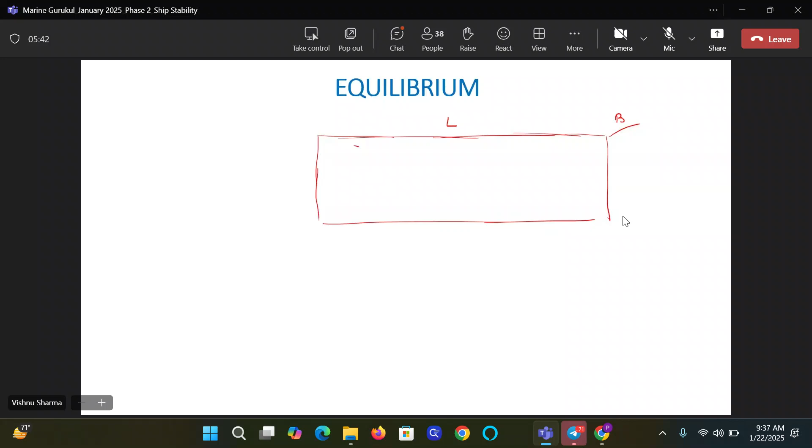Now, when the vessel is intact, what do you have? You have the weight of the ship. So let's say, just for the sake of easy explanation, let's have a box-shaped vessel. It can be any shaped vessel, doesn't matter. Let's say we have a box-shaped vessel of length capital L, breadth capital B, floating in intact condition at waterline WL at a draft D.

Okay, now let us say, guys, there is a compartment midships. It can be anywhere, of length small l, breadth small b, and the compartment is empty. Now the vessel is floating in the intact condition. We all know why the vessel is floating, why it is not sinking more, or why there is no further immersion.

It's not happening because in this condition, the displacement of the ship is totally balanced by the buoyant force of buoyancy, which is acting upwards. What is buoyancy? Buoyancy is the weight of water displaced. In this condition, what is the weight of the water displaced? So what is buoyancy, guys? Buoyancy, you all know, is the weight of water displaced.

And what is this weight of water displaced equal to? It's equal to the volume of water displaced into the density of the water. Now, if this buoyancy is equal to the displacement of the ship, there is an equilibrium between the two opposing forces, one acting downwards, the other acting upwards. And the vessel strikes an equilibrium and is now floating at draft D.

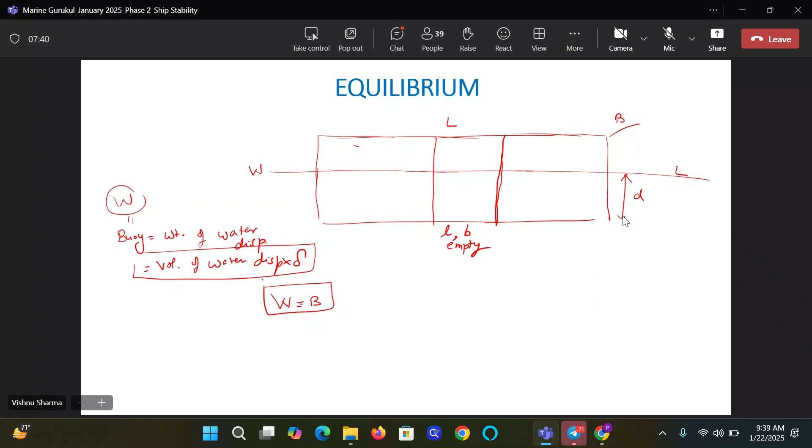Which volume in the intact condition is contributing or providing the buoyancy? Obviously, the underwater volume of the vessel is displacing water equal to the underwater volume in this case. So let me divide this underwater volume into three parts. Let's say part 1, part 2, part 3, or V1, V2, and V3.

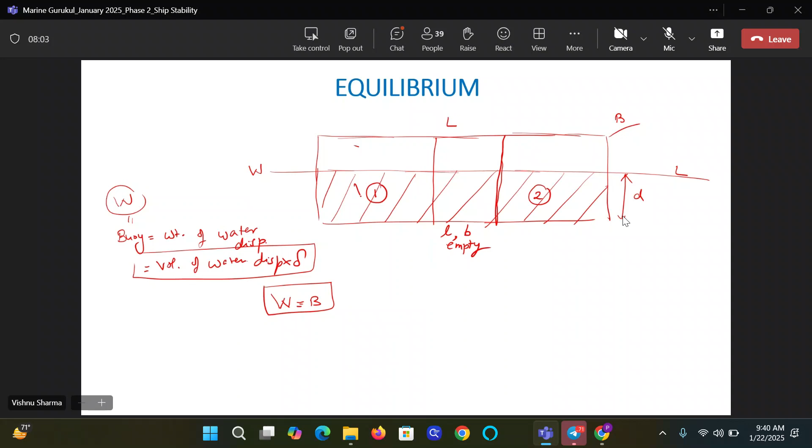In the intact condition, the buoyancy will be equal to total underwater volume V1 plus V2 plus V3 into the density of the water, whether it is seawater or dock water. And this buoyancy, as long as it's equal to displacement, the vessel will be in equilibrium, there will be no immersion. Neither will the draft decrease, nor will the draft increase. Right? Do you all appreciate this equilibrium in the intact condition, or does anybody have any questions or doubts in your mind about this condition, guys?

Don't think we are not touching bilging. Everything that I start from gets connected eventually to what you're doing. So if anybody has any doubts about buoyancy or anything, please let me know.

Through which point is the buoyancy assumed to be acting, guys? It's assumed to be acting through the point called the center of buoyancy, which we represent by capital B. Through which point is the weight of the ship assumed to be acting? It's assumed to be acting through the center of gravity, which in diagrams we'll represent by capital G. All this you're familiar with. Am I right, guys? Yes or no? Yes sir.

Now, what will happen if this compartment, which was earlier empty, of length small l and breadth small b, gets bilged? That means it gets damaged, its structure gets damaged below the waterline, not necessarily the keel. It can get damaged on the sides also, as long as the damage is below the waterline.

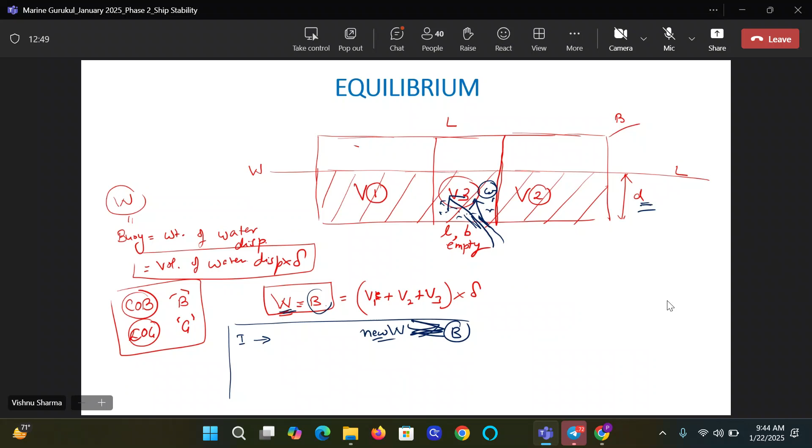Now, as this vessel sinks more and more, additional volume will go under the water, and what will happen? That buoyancy will start increasing. This sinkage will happen until the time the new buoyancy becomes equal to the new displacement. Am I right, Peter? Does it make sense? Yes, sir. Correct.

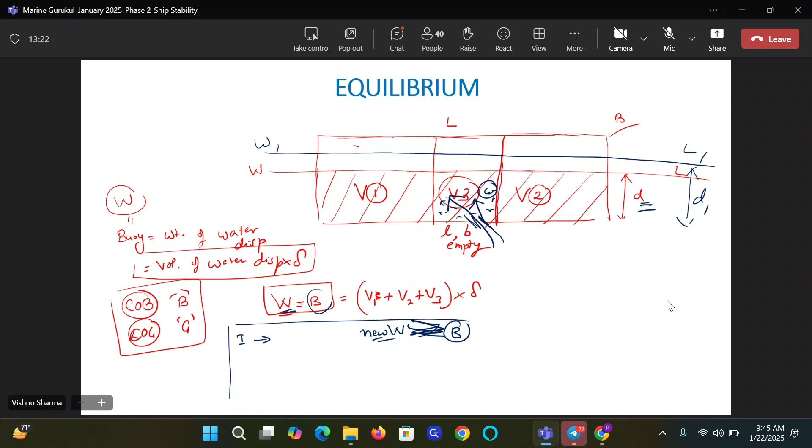When the new buoyancy, which is new underwater volume multiplied by density of the water, when the new buoyancy becomes equal to the new displacement, the vessel will reach another equilibrium at a new draft, D1. So water will rise in this compartment up to this level. This is the water which is assumed to have been added to the vessel. So the new displacement will be the old displacement plus the weight of the water in this blue box that I have made. And at W1L1, the buoyancy will also be equal to it, and a new equilibrium has been reached.

Very logical, guys, yes or no? Correct? Now, if you follow this process, what I have just described, the naval architects who follow this process of dealing with the water that has come in, this method is called the added weight method.

Sometimes these questions can also be theory questions. So this method will be called the added weight method. Why? Because you are assuming that the water which got into the ship because of bilging is the weight added on board or loaded on board, whatever you want to say.

And guys, you have done so many questions of MV Hindship, non-MV Hindship, in which whenever the weight is loaded or discharged on the ship, it does change the stability of the vessel. Am I right, beta? I'm not saying whether it increases the stability or decreases the stability. When you load a weight, what can it change? It can change the KG of the ship, it can change the GM of the ship.

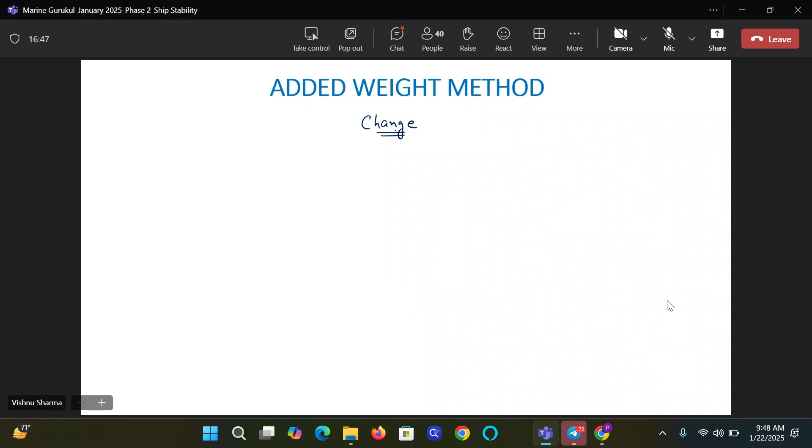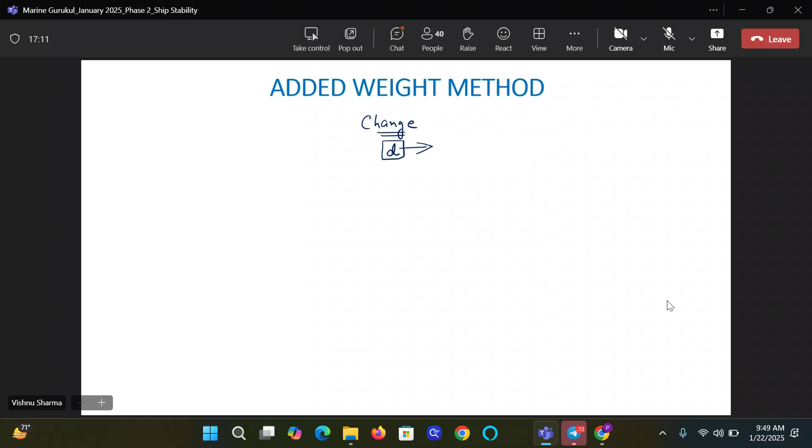So there will be a change in draft. Can you tell me what was the reason for change in draft? Was it reduction in buoyancy or was it an increase in displacement? What was the trigger? The trigger was increased displacement. Correct? This is the trigger for change in draft. Will the displacement increase? Yes, displacement is also increasing because the weight is added.

Now you all know what happens to the hydrostatic particulars. Eight of them are listed against draft, or if you enter against displacement, again draft becomes the eighth one. So what happens when the draft or the displacement change, do the hydrostatic particulars of the ship change? Yes or no? Yes, sir. All hydrostatic particulars will change. A change I have already written on top, so what all will change is what I'm writing here.

Guys, when you add a weight, does it potentially shift or does it have the capability of shifting the center of gravity of the ship? Yes or no? When you add a weight on a ship, does it have the potential of changing the center of gravity location? Yes, sir. So your center of gravity, in all likelihood, unless you add right at the old center of gravity, then of course there'll be no change.

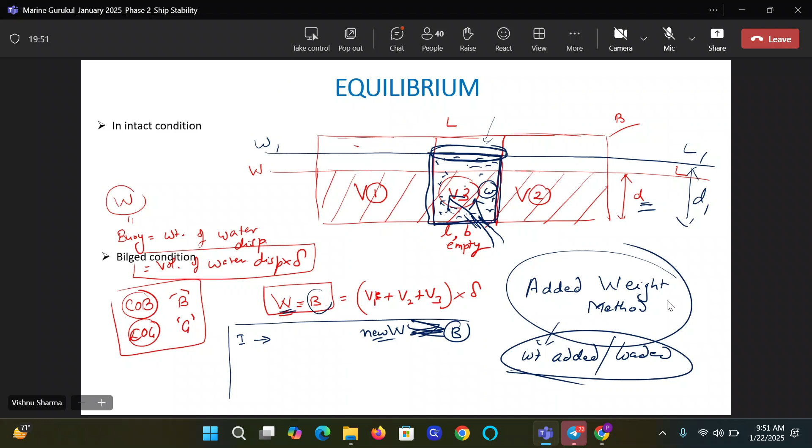So guys, if free surface is created in the bilged compartment, the FSM of the free surface will add to the FSM of the ship. Very logical, guys. Yes or no? Am I right?

Correct. Now, whether the FSM changes or does not change, tomorrow there may not be a free surface created. The compartment may be completely filled up with water, like a double bottom tank if it gets bilged. So the FSM may not be created, the FSM may remain unchanged. But in that case also, FSC will always change. Why? Because the displacement has changed.

Even if FSM remains the same, change of displacement will cause a change in FSC. Am I right, class? Yes or no? Yes, sir. Okay, so now you know what all changes have taken place. You can find the new parameter, whatever is required, whether draft, whether GM, whether list, whatever, the way you have been dealing with the loading of weights, which you are very conversant with.

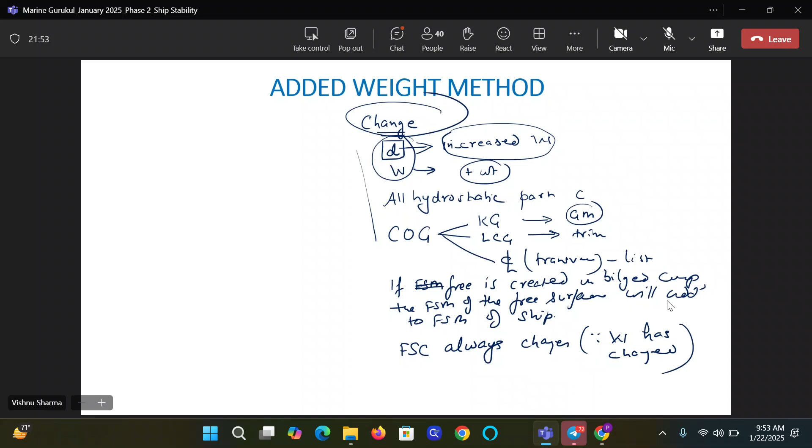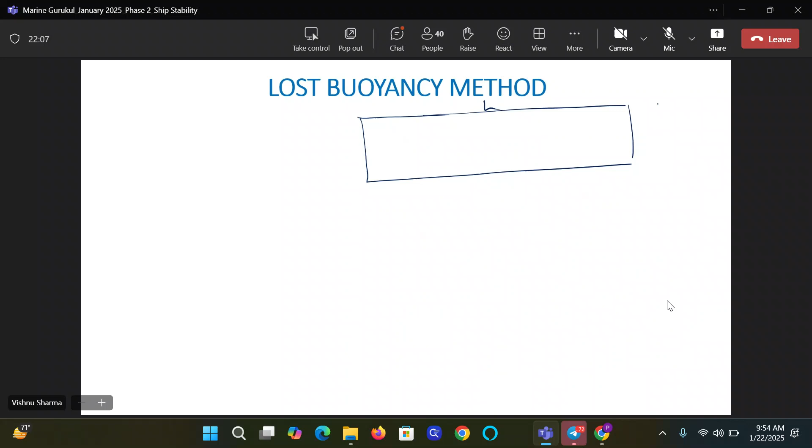Now there is another school of naval architects which say, no, we don't want to treat it as the weight added on the ship. What is their logic? Their logic is this: this was the vessel in the intact condition, floating at this waterline WL at a draft of D, had this empty compartment of length small l, small b, and the compartment is empty.

Now, this compartment suffers bilging. We had called these volumes V1, V2, and V3. Which all volumes were responsible for providing buoyancy, which we call volume of buoyancy? Was it V1 plus V2 plus V3? Yes, all three of them. Good. And this volume of buoyancy was equal to volume of displacement.

What is volume of displacement? The displacement of the ship divided by the density of the water. So this volume of buoyancy and volume of displacement were same, they were in equilibrium. If you multiply volume of buoyancy by density and volume of displacement by density, one becomes displacement, other becomes buoyancy. Both are equal. The vessel is in equilibrium.

Now, like the earlier case, let this empty compartment get bilged or suffer bilging. The water enters into this compartment. Now, when you ballast a tank, what do you do?

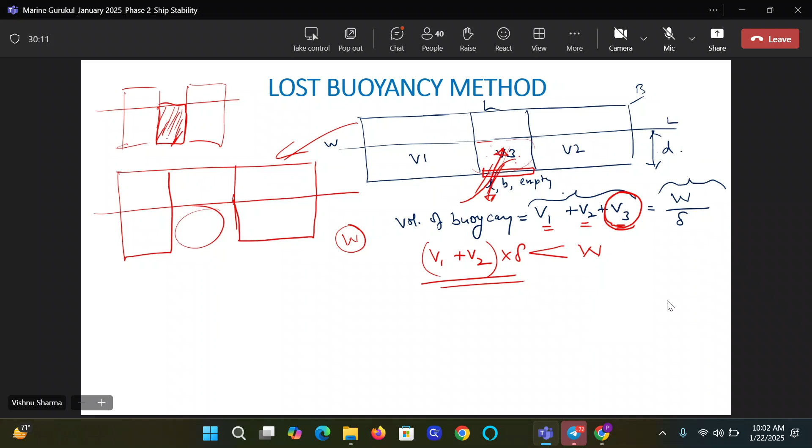Displacement has not changed, but buoyancy has fallen short because some buoyancy was lost due to bilging. So buoyancy is less and displacement is more. There is a resultant downward force which will cause the vessel to sink. As she sinks more, the buoyancy will increase, and at some new draft, when new buoyancy becomes equal to new displacement, the vessel will reach a new equilibrium.

Now in this case, has the draft increased? Yes. So what has increased here - the draft has increased. But what is the trigger for the change of draft? Buoyancy becoming less than displacement - that was the trigger for draft to increase. So the outcome is the same as the previous case, same as under the added weight method. The vessel goes to a new draft in both cases.

In the added weight method, the trigger was an assumed increase in displacement. Here the trigger is an assumed reduction of buoyancy. Since this method is based on the concept of buoyancy having been lost, this method is called the lost buoyancy method. So is it clear why it is called the lost buoyancy method?

So now let me make a list of things which will change and not change in this method. What will change? You just told me draft would change - very good, it's going to change. What will happen to displacement? Is the displacement changing in this method, guys? No sir. Why not? Have you added any weight on the ship? No sir.

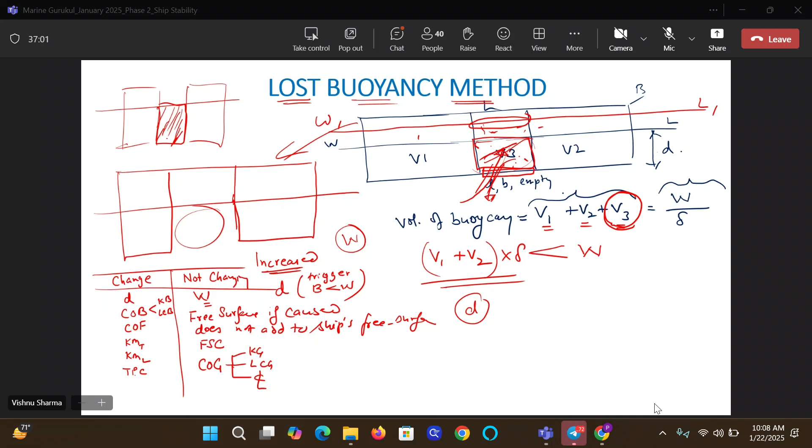Then if there is no technical superiority, the preference of a method boils down to the convenience of the user. Am I right, guys? If there is no technical superiority, then which method you would prefer depends, in a given scenario, on what helps, what you find convenient. Am I right, guys? Yes, sir.

Yes, sir. Now, in most cases, because the displacement does not change, the center of gravity does not change, and the free surface inside the bilged compartment does not bother you, therefore lost buoyancy method becomes more convenient in most of the cases. Therefore, in most cases we use lost buoyancy method.

Only in stray cases where you can clearly see that added weight method is making my life easier, I may switch over, but I will not switch over on day one. We'll talk about it on the last day when we do bilging.

So what is the preferred method? Preferred method is lost buoyancy method. Reason for preference is not technical superiority, it's the convenience, because many important parameters do not undergo a change under lost buoyancy method. Am I clear to everybody?

Yes, Captain. Okay, so please don't tell me tomorrow that I told you lost buoyancy method is better. No. Lost buoyancy method is more convenient, and that's why most of the time we'll be using this.

So if you want to note down anything, note it down. This can also come as 'compare lost buoyancy method with added weight method' or 'describe any one of them' — whatever it is, that can be part of your theory question also. So please don't mess it up if it comes in theory.

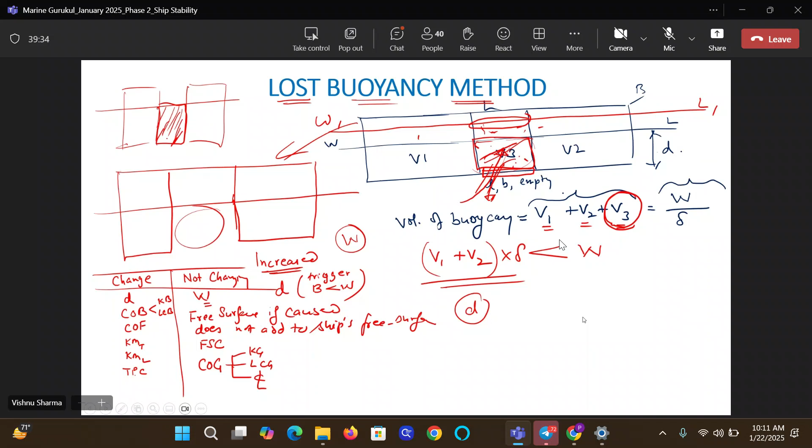Now, guys, what did we see — that the draft has increased? So in every case, the first requirement will be to get the new draft at which the vessel will float post bilging. What will be the new draft after bilging? So that will be the first requirement that comes. And that is called sinkage.

Now, I don't have everything prepared in hand because requirements change from batch to batch. People come with different types of doubts, and therefore it is always explained live in the class, guys. So please feel free to let me know if you have any questions.

Guys, now we'll find sinkage in the lost buoyancy method. I'm keeping the compartment midships. We'll keep moving things later on. Let's first learn things in steps.

Guys, when we do the questions, you will have to use notations, because otherwise, if you start using values from the word go, your life will become miserable. Whenever we do the questions, the length of the ship will always be represented by capital L. The breadth of the ship will always be represented by capital B. The water line in the intact condition will always be represented by WL, and the draft in the intact condition will always be represented by small d.

And let us say this ship has a midship compartment extending from side to side or not, it doesn't matter, having length small l. So compartment length will always be represented by small l. Breadth of the compartment will always be represented by small b. Now, this compartment is empty.

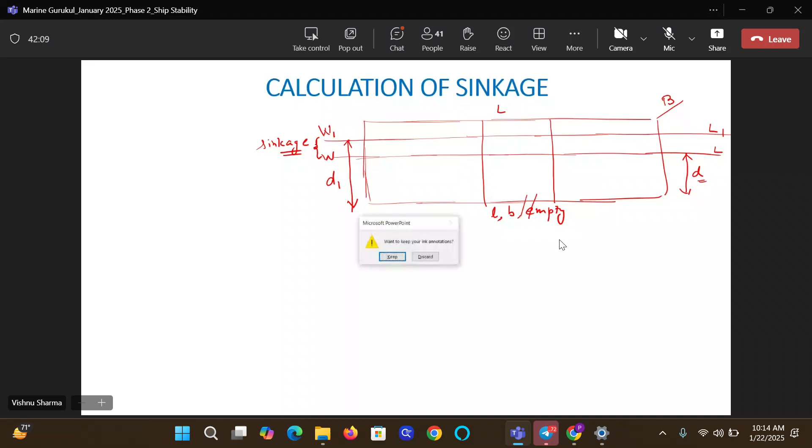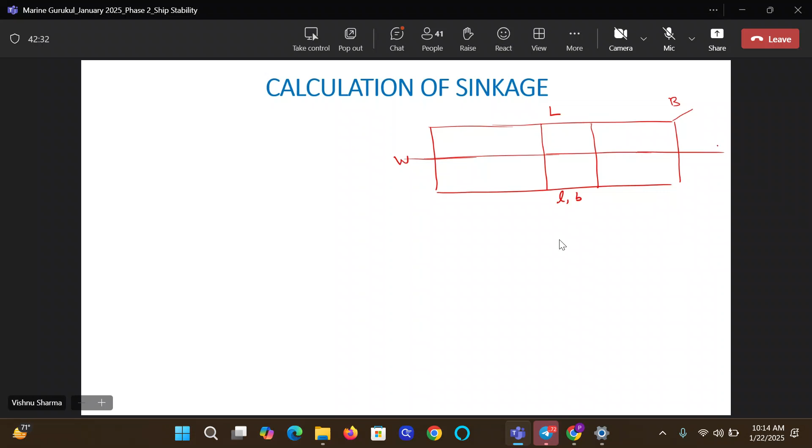Now, in the intact condition, I'll clear this diagram. I've explained this, I'll mark them now in steps. Otherwise, in this diagram, some of you will again start going left, right, because I'll add W1, L1 in steps. We have length, breadth, and the vessel is floating here with draft D. We have volume 1, volume 2, and volume 3.

Now, guys, in the intact condition, volume of buoyancy is equal to V1 plus V2 plus V3. I'm sure everybody agrees with it, right? Yes, sir. Correct? Now, if this compartment gets bilged, which buoyancy is lost?

Which buoyancy is lost if this empty compartment is bilged? V3. So that means now I'm shading the lost buoyancy. Now somebody may say, sir, water will rise further up, that will be lost buoyancy. Guys, in the intact condition, the volume above the water line is your reserve buoyancy, which will help you in surviving if there is bilging.

So buoyancy lost is not up to the new draft, it is only up to the intact water line, correct? So do you all agree with me that buoyancy lost in this case will be V3? But if I write it in notational form, since every time we won't call it V1, V2, V3, this is equal to small l into small b into d. Does everybody agree?

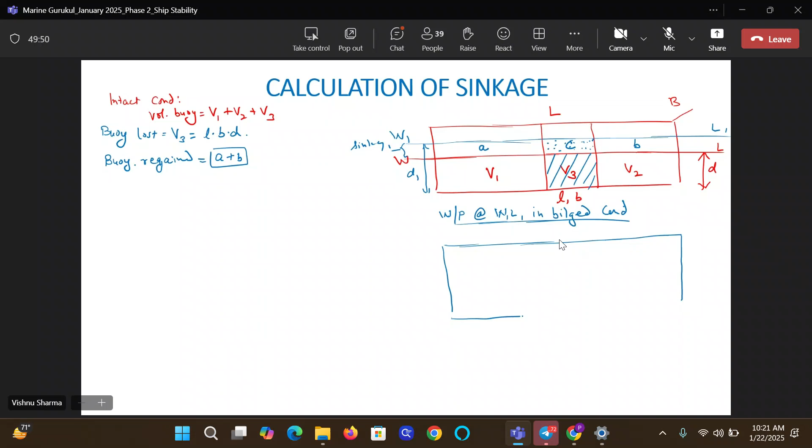Tell me. A rectangle, a big rectangle, of what dimensions? L into B, capital L into capital B. So you will see the ship structure at the water line like this, and then you'll see this bulkhead and this bulkhead being like this here. Am I right, guys?

When you cut the ship, will you see the seawater here? Yes or no? At the water line, when you cut at W1L1, will you see seawater from top in a bird's eye view? Yes, yes, yes, okay.

So this total length of the water plane is L, the total breadth of the water plane is B. But this part of the water plane is not intact, it is lost to sea because this is occupied by seawater. And what is the length of this water plane? Small l. And its breadth? Small b. Small b can be the same as capital B or less than that, doesn't matter. That's why it's written like this.

Does everybody agree that some water plane is lost? Yes or no? Am I right, guys? Yes. Now I'll introduce a few terms which need to be clearly understood because we'll be using them in our discussion.

One is whole water plane. Whole water plane in this diagram is capital L into capital B. Then lost water plane area in this diagram is small l into small b.

The remaining area which is still intact is called the intact water plane area, and which will be here in this case. Somebody can say, sir, I'll add A1 and A2. Yes, you're right, that is the intact area. But normally, just so most of the questions fit in comfortably, you can do A1 plus A2, but I think a convenient way would be if I say whole water plane minus lost water plane. Does anybody have any objection to that instead of saying A1 plus A2?

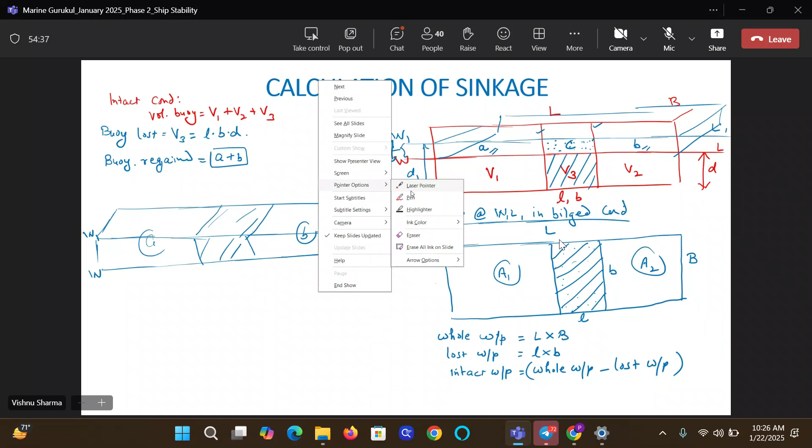Is the water plane at WL like this? With this much lost at WL, is this the water plane? If I cut the ship in the bilged condition here, will the water plane be same? If I cut somewhere between WL and W1L1, will the water plane be same? Some of it will be lost. Yes or no?

Water plane at W1L1, you have already agreed. That means the water plane from WL to W1L1 in the bilged condition is the same. Does everybody accept it, or does anybody have any doubts?

Guys, can you close your register and put it flat, your notebook flat on the table? The notebook will look like this, what I have kept. Yes or no, beta?

Correct? If I ask you to calculate the volume of the notebook, what will you do? You'll measure the length, you'll measure the breadth, and you'll measure the height of the notebook, and you'll multiply to give me the volume.

Now, if in your notebook I cut out some part, it may be from one end to the other, or it may be something here like this. Now, if I cut out from one page to the other, why did you multiply capital L and capital B with the height? Because the area of each page was the same, each page was length into breadth. Therefore, you multiplied with height. Am I right, guys?

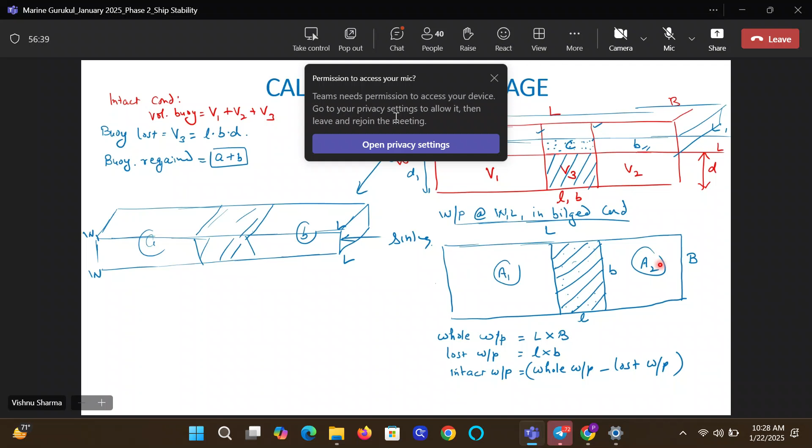Now, if I have to calculate the intact, the whole A plus B here, one way is I can calculate A plus small b. Second, can I take the intact water plane and multiply by the height of the notebook?

If I cut out something from your notebook and each page has the same area cut, the cutting is the same on all pages. So every page has lost the same area, correct? If every page loses the same area, then the left area in each page will be the same. Yes or no?

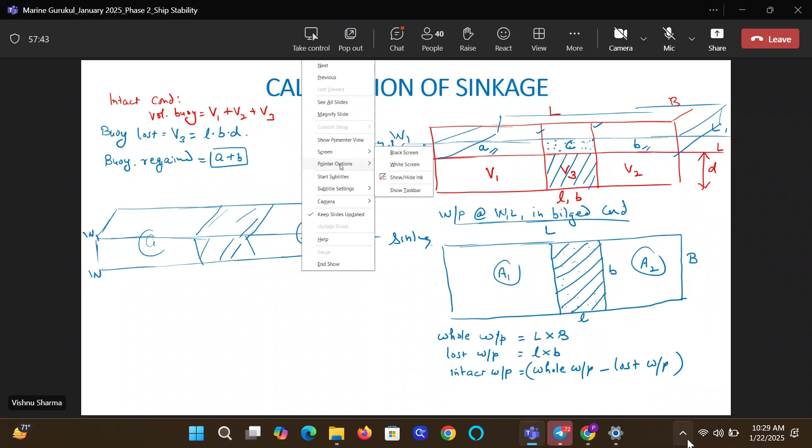And if I calculate whatever is left out in the page and multiply by the height, will I get the left out volume, the remaining volume? Yes or no? Do you agree with me? Tell me, yes or no.

Okay, so instead of calculating A and B separately -- and what is A and B? You have already told me A and B is the buoyancy regained. So if I write like this, am I making any mistake? That buoyancy regained will be equal to intact water plane area, multiplied by sinkage.

Buoyancy regained will be intact water plane area into sinkage. Like I told you with your notebook, if you cut out the same area from your notebook on all the pages, then how can you calculate the remaining volume? Remaining volume will be the remaining area on each page multiplied by the height of the notebook. Yes or no? Am I right, guys?

Anybody in the class who is not on board, please let me know, because once I clear this, coming back will unnecessarily eat more time. If you have any doubts, let's discuss them here.

The vessel floats on law of flotation. So how much buoyancy has the vessel got to regain? She will regain as much as she lost, because buoyancy cannot become more than the displacement of the ship. The vessel will regain buoyancy equal to what it lost. So by law of flotation, buoyancy regained has to be equal to buoyancy lost.

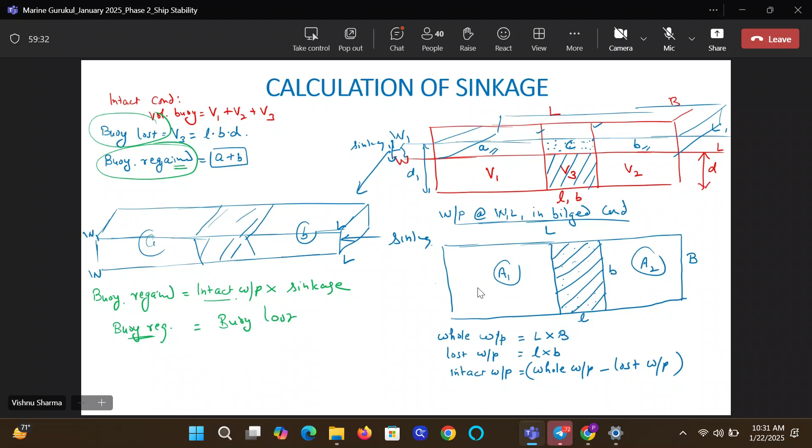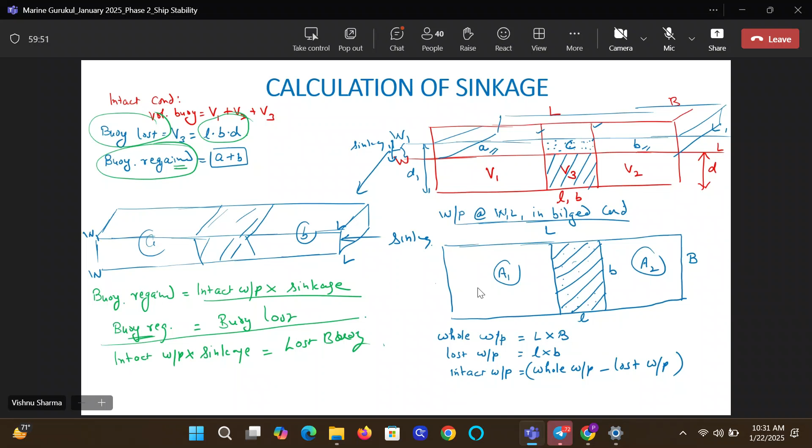What is buoyancy regained? We have got it as intact water plane into sinkage. How much is the buoyancy lost here? You wrote it as small l, small b, small d, but I'll just say lost buoyancy, whatever it is. From this expression, what do you get sinkage equal to? Sinkage is equal to lost buoyancy divided by intact water plane. Do you agree with me? Yes or no?

Please review it. Let me know if there is any concern or doubt. This is the formula which will be used to calculate the sinkage that is caused. Please take your time, 30, 40, 50 seconds, a minute to review it. And if something is not clicking and you want more clarification, I'll try and change examples if I can. Let me know your doubts.

Everybody seems to be aligned, is it? Shall I take it that way, class? Because there are no questions coming. Clear? Because after this we'll go to the questions. Of course questions will start with simple ones, then variations will come. All that will be part of the learning process. So if there are no doubts, can I go to questions then? Please give me a go ahead if everybody is okay with it.

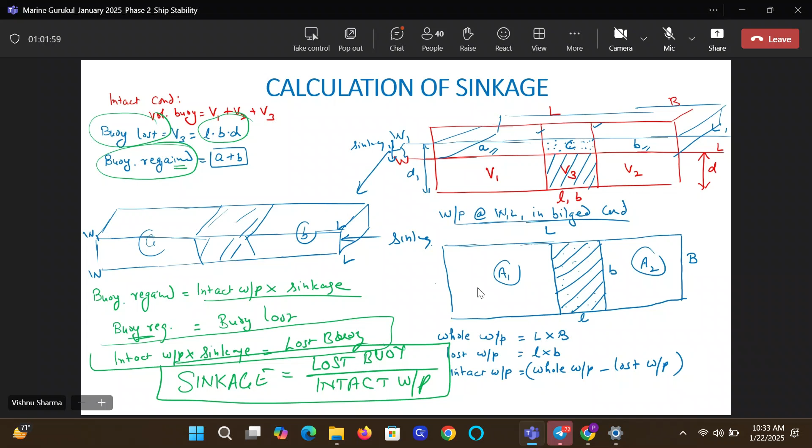Please remember sinkage is equal to lost buoyancy upon intact water plane. And now I'll tell you stepwise the process of doing these questions. As we go through a question, I will tell you. Here is the first question.

Before bilging you already know, I just want to revise again so that people don't miss it. Now, what you'll do, I'm doing part one right now, not the bilging part, I'm doing the intact part right now. How do you get GM based on our discussion on moment of inertia?

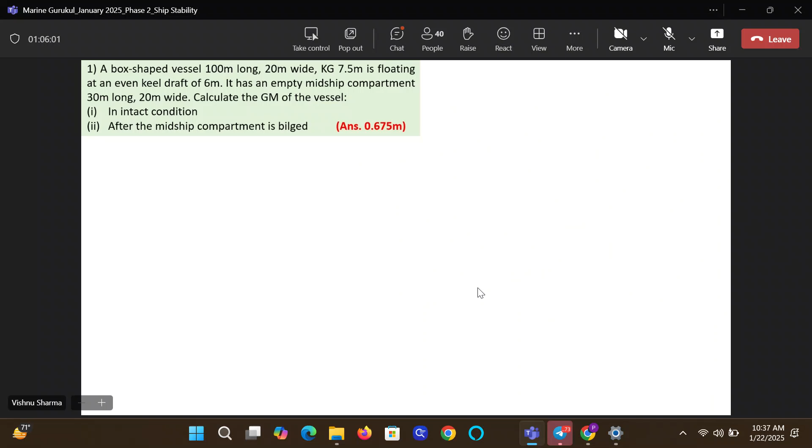Okay, now we go to the bilged part of it. Pay attention, and anytime you have any doubt, just unmute and interject. Guys, when we deal with the bilging thing, diagrams are very important.

First, we'll make the side profile view. What do I mean by profile view? This one. So first make the intact condition.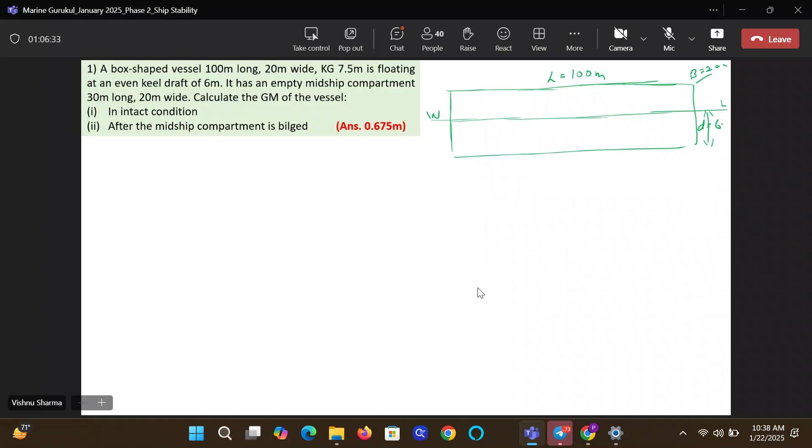Pay attention, this will hold the key to the entire discussion. Capital L, the length, capital B, the breadth, intact water line, WL, draft small d, 6 meters, then the compartment in question, small l, 30 meters, small b, 20 meters is empty.

Is this bilge condition or intact condition, guys? Intact condition. Very good. Now, after this, I'm changing my marker to red. This what I have done is the intact condition.

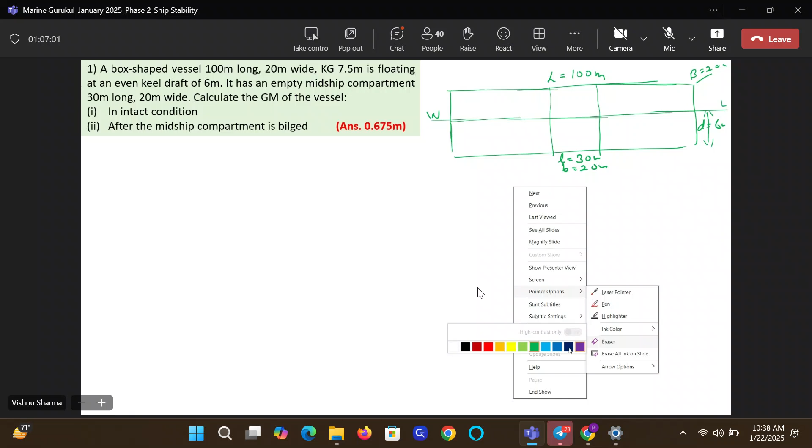Now, based on the question, you will shade the lost buoyancy. I am sure in this case, you will agree that the lost buoyancy is this. So you'll shade it like this. Correct, beta?

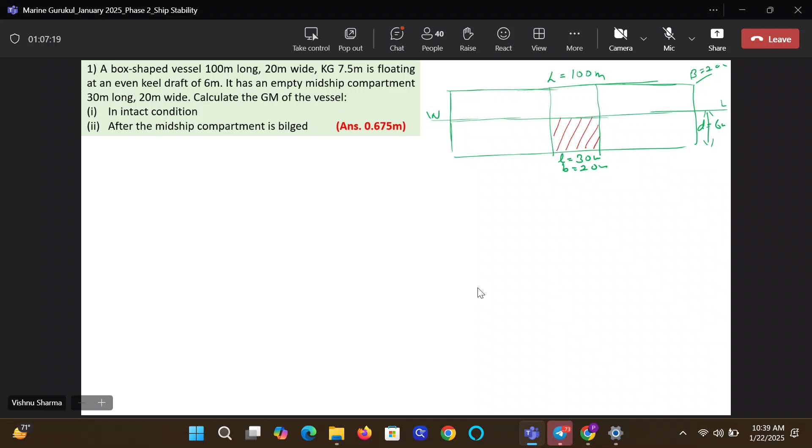Yes sir. Then you know that we are following the lost buoyancy method class. Under lost buoyancy method, if buoyancy is lost, that will cause the vessel to sink and she will come to a new equilibrium. Of course, if she sinks and does not survive, then you're not here to do all this, right? She sinks to a new water line W1 L1.

Correct, beta? Does everybody agree? Yes, sir. Now, you will look at the situation and then ask yourself this question.

Will the water rise in the bilge compartment from WL to W1 L1? What is your answer, yes or no? Yes. Just dot it, don't cross it, because the crossed one is the lost buoyancy. Otherwise, it will mislead you.

We'll have the final draft of D1 here when it comes. Any questions on this side profile diagram, clear guys? Is that clear to everybody what is to be shaded, how it has to be drawn?

Now, next you will draw the water plane area at which level, at what draft? W1, L1. The bilged final draft.

Based on our discussion on the previous slide a while back, I'm sure, and if you don't agree with me please let me know, I'm sure you'll agree that the water plane area will be 100 meters by 20 meters. You will see these bulkheads here, and this will be lost.

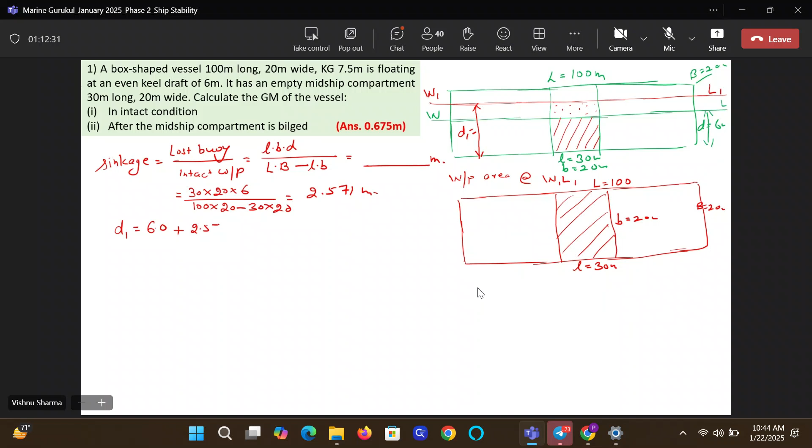How much will be D1 then? 8.571. Very good. Put it on the diagram.

Guys, whatever steps I'm telling you, if you follow them religiously, don't try to cut short, don't try to unnecessarily go left, right. You will have no problems.

Now, guys, we need the GM in the bilged condition. So what do we need to calculate? We need to calculate KM, in bilged condition. What is KM equal to? KM is equal to KB in the bilged condition plus BM in the bilged condition.

Now, guys, in this case, KB will come D1 by 2. But I'll tell you later when it will be D1 by 2, and if you can make out, you can avoid calculations. But every time it is not going to be D1 by 2. Whether it is D1 by 2 or not, whenever you have doubt, you can always resort to calculations.

Now let me tell you how to calculate KB. Though I know it will be D1 by 2, we have to learn the method of calculation.

Guys, KB will be calculated by principle of moments, and moment about which axis? Keel. Now, whatever I'm messing up in the diagram, please don't do that. Don't mess up your diagram.

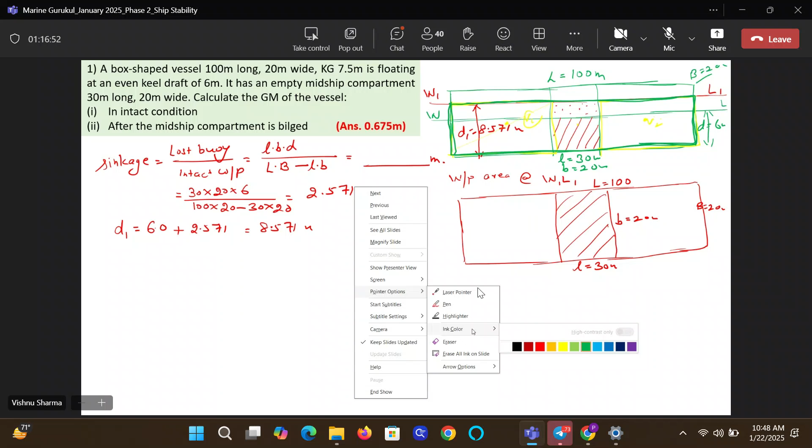Yes, correct. Out of this entire underwater volume, this volume, where I'm making the red box, is not contributing to buoyancy. Correct, beta?

Yes, sir. Out of this underwater volume, can you tell me in notational form which volume is not contributing to buoyancy? Small l into small b into D1. Very good.

If I take the lever of this volume about keel, I'll get the vertical moment of the volume which is under the water but not contributing to buoyancy. Am I right? Can I get the vertical moment of this red volume also? Correct, beta?

So instead of adding the vertical moment of one volume to the other, what I'm doing now is from the whole, I'm subtracting what is not helping my cause. So can I say that if I take the vertical moment of the underwater volume and from there I knock off or subtract the vertical moment of the volume which is under the water but not contributing to buoyancy, what will I be left with? Tell me, what do you think I'll be left with?

Intact buoyancy, we'll be left with vertical moment of volume of buoyancy, right? I'm saying if I take vertical moment of underwater volume up to bilged water line, and from here I subtract vertical moment of underwater volume not contributing to buoyancy, what will I be left with? Will I not be left with vertical moment of volume of buoyancy? Yes or no? Am I right?

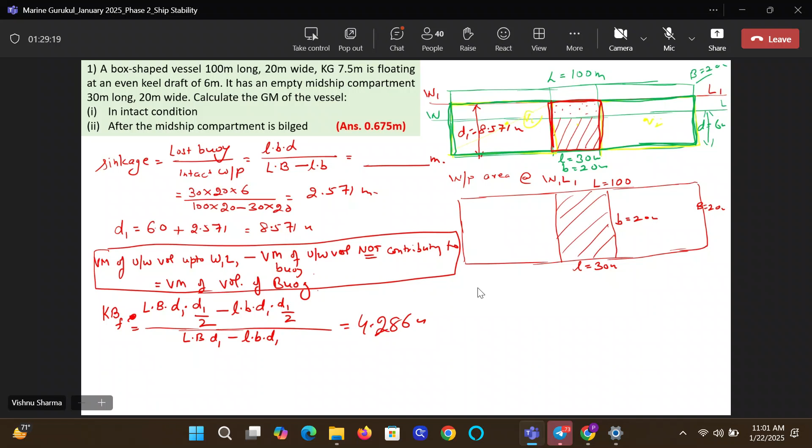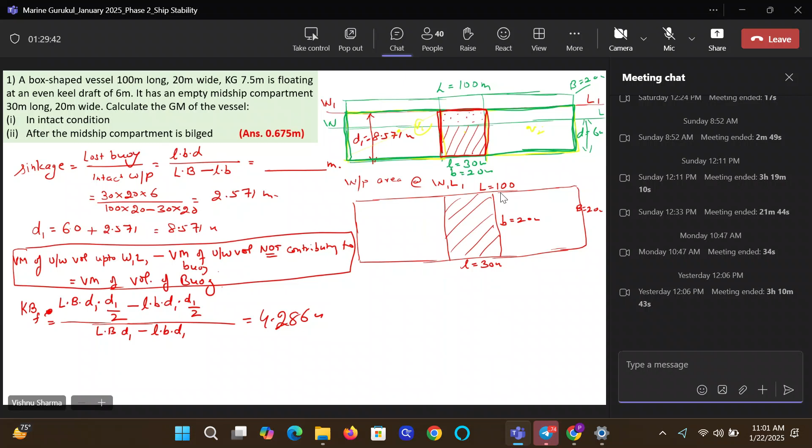Good. Oh, there's a power cut. Guys, I'll wait for a few minutes. If it does not set in, then I'll take everything down and leave, or I'll have to make some arrangements here to connect power back.